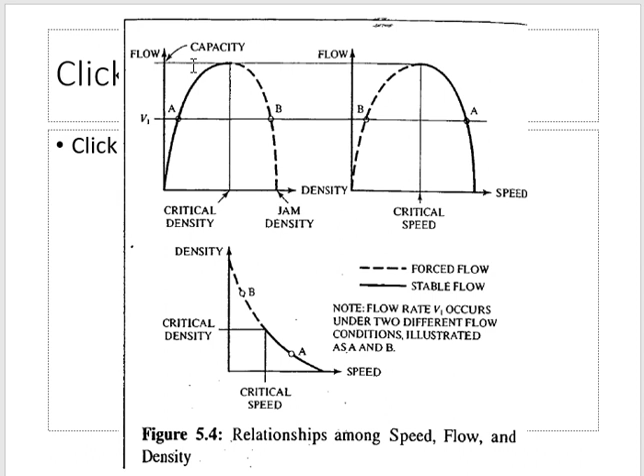These are the equations of the curve: V equals 65d and so on, V equals 110s and so on. You take the derivative, it will become the equation of the slope.

And when you are at capacity, the slope is 0. So I take the derivative and put it equal to 0. I can do the same thing with both equations, right? Because in both cases, whether that curve or that curve, it is 0.

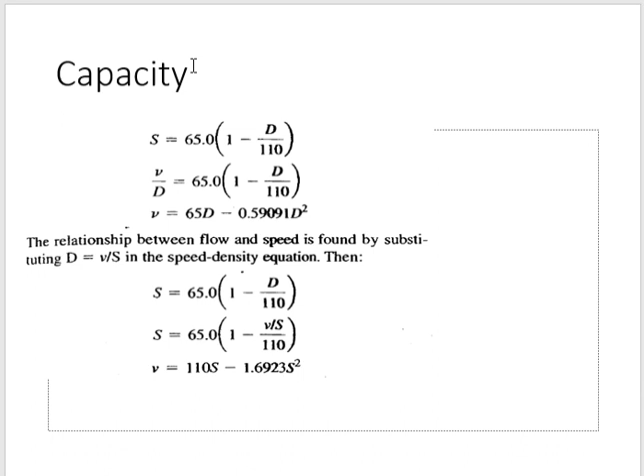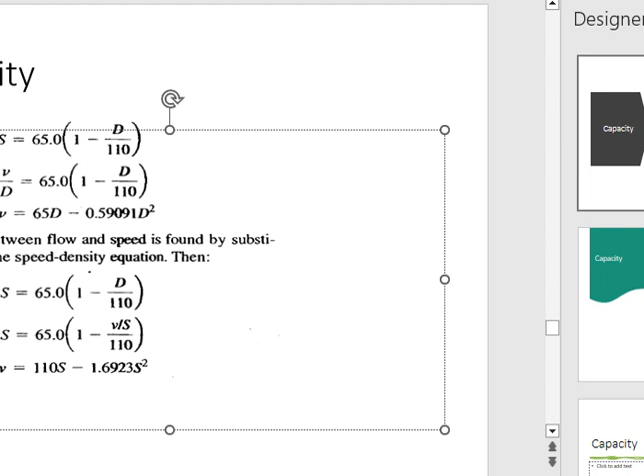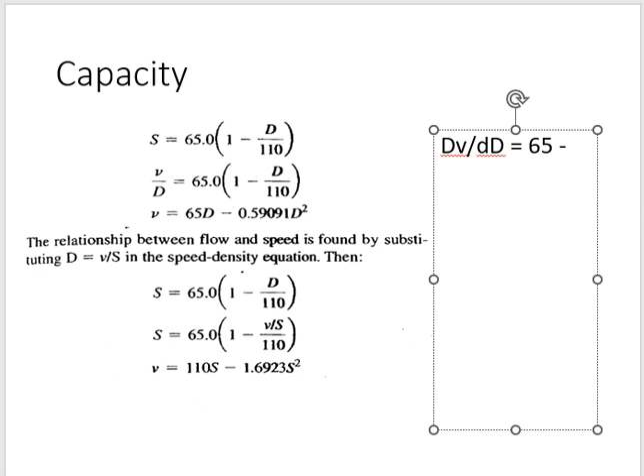This is done here, right? So derivative of the first equation, between flow and density, dV upon dd equals 65 minus 2 into 0.5909 D, and this should be equal to 0.

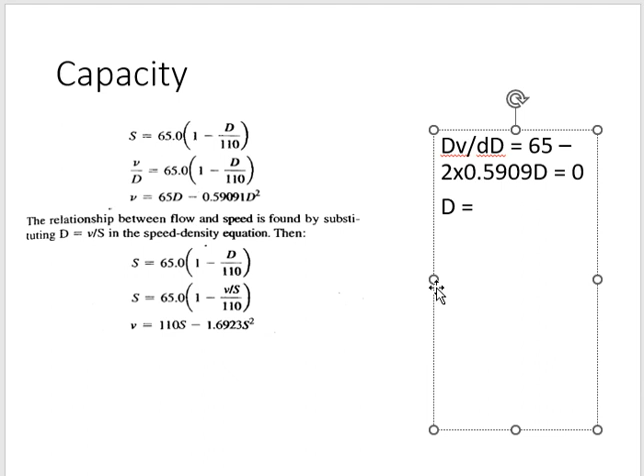So give me D. 55 vehicles per mile per lane.

Okay, clear up till now? Now, this is the D when slope is 0, and slope is 0 at maximum flow, and maximum flow is called capacity. So this is the density value when you reach capacity.

And we gave it another name - what was it? Critical density. So this is my critical density, I will write CR here. Capacity is per lane.

This is for that equation. Remember, we had a curve and some data - you change the data, these values will change. Any problem till here?

Now, if I do the same thing with the flow speed equation, dV by ds, it will be 110 minus 2 into 1.6923 S, and this should be equal to 0. So S equals to what?

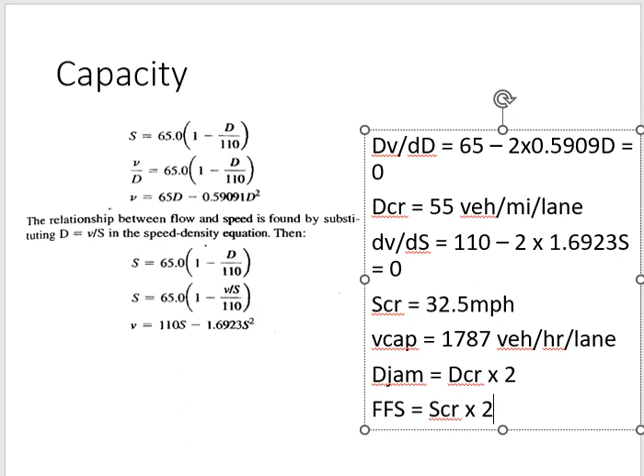Just to prove the point, we have another example. In this example, they already gave me the straight line equation between speed and density. The others are not a straight line, they are something else. Now they are saying find out the free flow speed, jam density, derive the other relationships between flow and speed and flow and density, and find out the capacity.

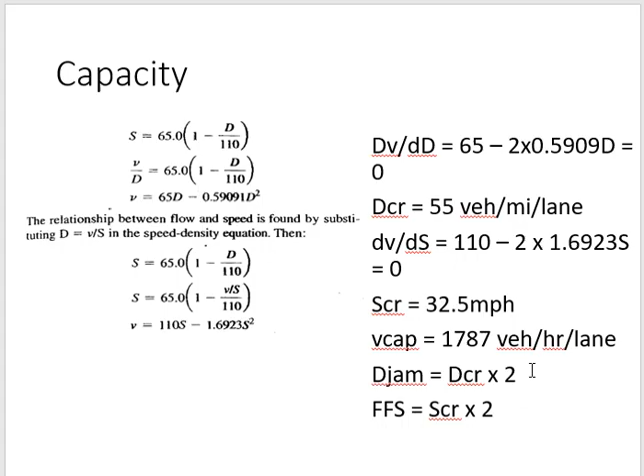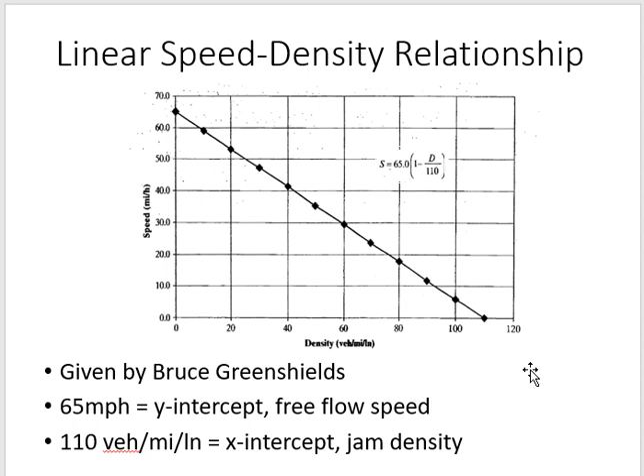Clear? Three things. Let's start with the first one, free flow speed. I'll go to the speed density curve. Don't look at the values, but look at the line itself. When I reach free flow speed, my density is what? 0. You have the equation, right? Between speed and density, equation is given. So now what do you do in this equation? Put 0 density, you will get free flow speed.

What about jam density? You were saying something? No? For jam density, speed is 0, it's jam, right? So no speed. So now what do we do? I put speed as 0, I will get jam density. So give me free flow speed and jam density.

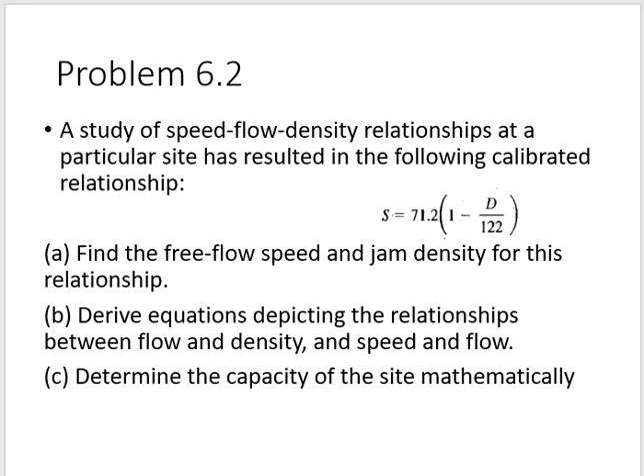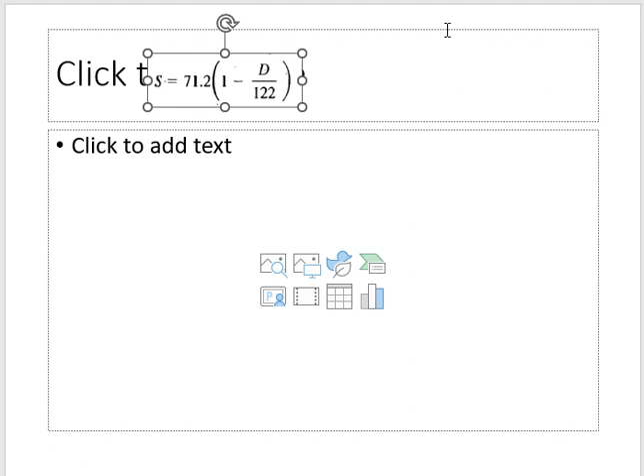Very smart. Yeah, it's correct. I don't mind if you do like this, no problem. Yeah, free flow speed is 71.2. But I'm telling you how do you get it. At free flow speed, density is 0, put density as 0, you will get 71.2, no problem.

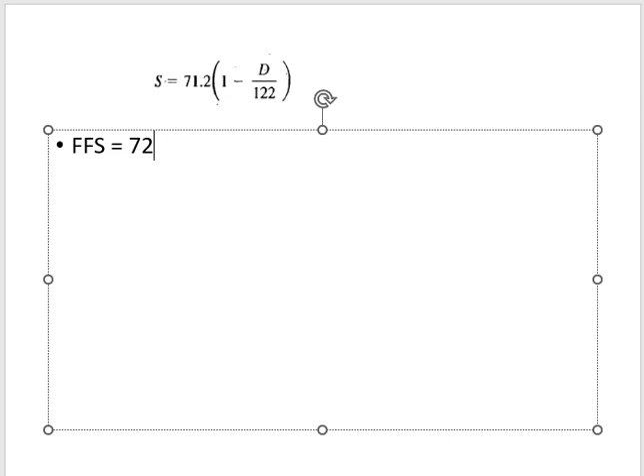And jam density, you put speed as 0, density equals to what? 122. Okay, you get the point, right? How do I get it? If you take 1 minute extra, no problem.

Clear up till now? We did the first part, this was the first part. Second part is find out other relationships. For other relationships, I have this equation.

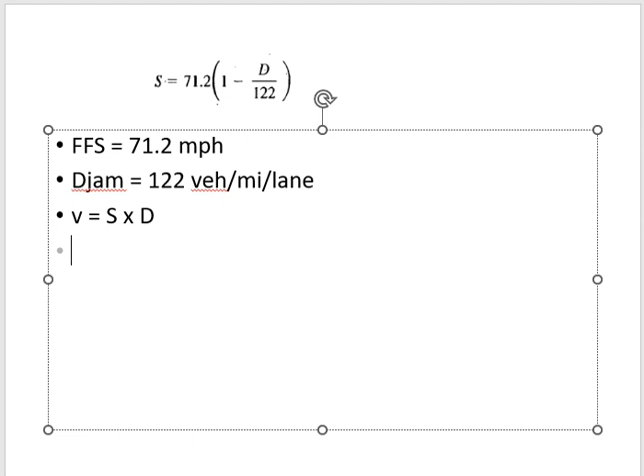And which other equation did we use? Flow rate equals... okay, so from here I will take, which one first, D or S? S, it's easier, V on D. So in the top equation you will put now V upon D equals 71.2 minus, I am opening the bracket now, 71.2 upon 122 D.

So V equals to what? 71.2 D minus... how much is this? 0.584 D square. Let me put it like this. Any problem?

V equals S into D. So S equals V upon D. I replace S with V upon D. So this becomes this. I open the bracket, replace S with V upon D, and then I open this bracket. And you put D, then I put D over here. Clear? Any question? They need these equations now.

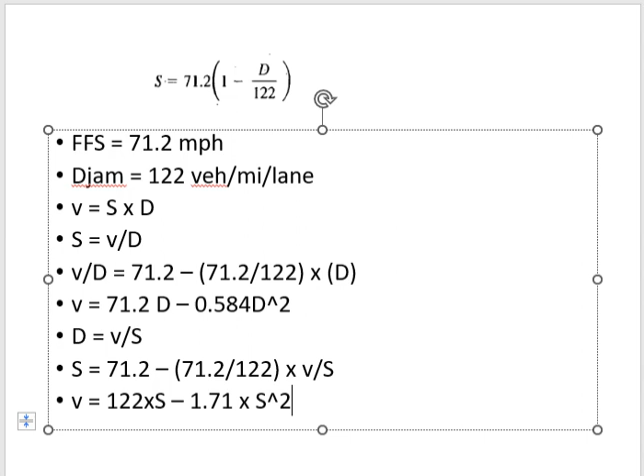Last time, in the previous example, we were looking at what will happen to critical speed and critical density. So I took the derivative of both equations. Here you don't have to do this, you can pick one equation. Pick any one, which one? This one or this one? We will do the voting. Who says this one? And who says this one? And the rest are sleeping. Right? There's no big deal, it will be the same, right? Okay, let us pick this one.

So dV by dD is what? 71.2 into... okay, and this gives you D critical of what? How much? 60.96.

Okay, so this is the D when you reach capacity. Now you put this D back into this equation. The flow you will get is capacity. Okay, how much is this?

Two one... 70. So in the last question it was 1700 something. In this question it is 2100 something. You can see the difference, right? So it's not a small difference, it's a big difference. Clear? It can be even less than this or more than this. It can go up to 2,300 as well, 2,400 as well. It can be as low as 1,500 or 1,400.

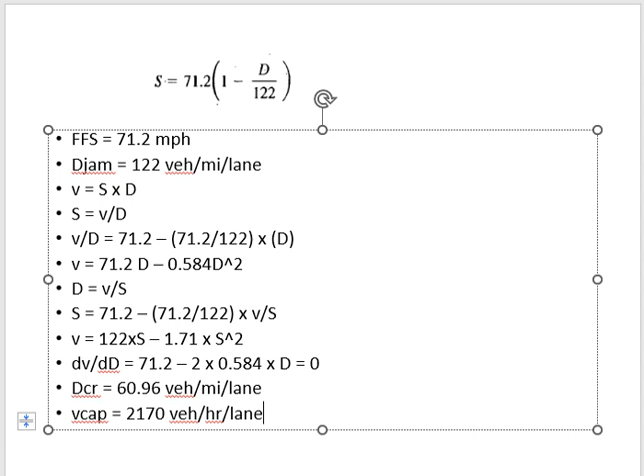Okay. We said there are two types of facilities, right? Interrupted and uninterrupted. What's the main difference between them? What's the difference between interrupted flow and uninterrupted flow? External interruption, right? And we put external interruption because of what? Because of intersections. Okay, so all these calculations we did up till now, the graphs, the equations, all of them were for uninterrupted.

Okay, so traffic increases, speed reduces, density increases, and so on. Everything works fine when uninterrupted. When you come to interrupted, the main thing is there is some external interruption, maybe a signal, a stop sign, a roundabout, and that external interruption will stop you. Whether the traffic in your direction is high or low doesn't matter, whether the density is high or low doesn't matter. You reach that interruption, you have to slow down, you have to stop, okay?

So obviously in those equations, the equations which we just did, was there anything indicating there will be a signal, a roundabout, a stop sign, a car coming from the parking? So those equations will not work. But even on interrupted flow facilities, we may use those equations in some parts. Which parts? The parts when you have crossed the interruption. So you were on a signal, people who are coming on the signal, those equations will not work for them because the signal is stopping them. But what will happen when they pass the signal? When they cross the signal, until the next signal comes, their flow is uninterrupted.

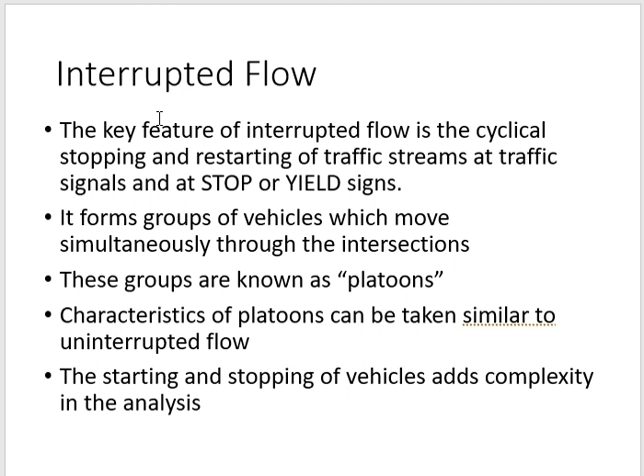There are some important terms for us, and they are all related to volume, and I have mentioned them earlier. One of them is traffic demand, then we have traffic volume, and then we have capacity. Demand, volume, capacity. Now, traffic volume means what? Number of vehicles per hour or per day. Normally we take 1 hour. Hourly volume is more common, and here we are talking about hourly volume because we are comparing it with the other terms, capacity and demand. What is capacity?

Maximum rate of flow. What is demand? Demand is volume. Demand can be volume, yes. Or demand can be desire to pass.

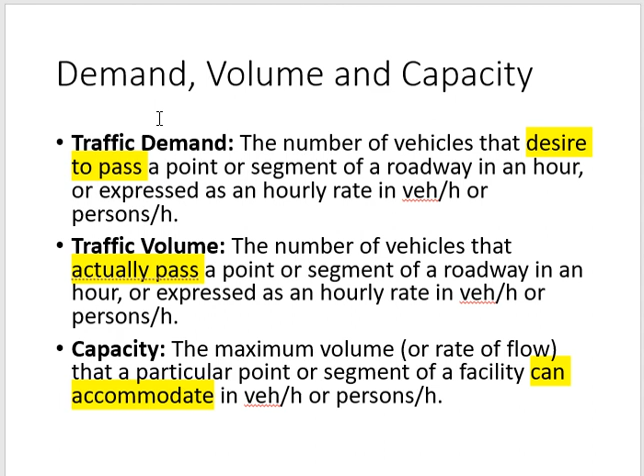The other two can change. Demand and volume can change. Which one affects the other? Demand affects volume. High demand, high volume, and vice versa.

There can be certain cases in which demand can go more than volume. Demand can be more than volume, more than capacity. There can be cases where demand is more than capacity. We see it very often on the roads. You get stuck in traffic jam, long queues. So this is a situation when demand is more than capacity.

If this happens, what can we do? There are certain actions written here. What can you do as a driver? Or what can you do as an authority? Let's say you are in the traffic authority, so you are planning, you want to reduce a traffic jam. You know on this road at this time there is a traffic jam. What can you do? Or you are the driver. You know at this time and this road there will be a traffic jam. So what do we do?

Change it. You tell your teacher, I cannot come at this time, transfer me to the other section. No, you change, and then you sleep at home till 12 o'clock. Yeah, you change to other highways, you change to other routes. You tell the driver there is a congestion ahead, or the driver himself knows there is congestion on this road and he goes to some other route. In some cases, you may go to a longer route to avoid congestion, because if you go there, you will be stuck in traffic jam for half an hour. This longer route will only take 5 minutes extra.

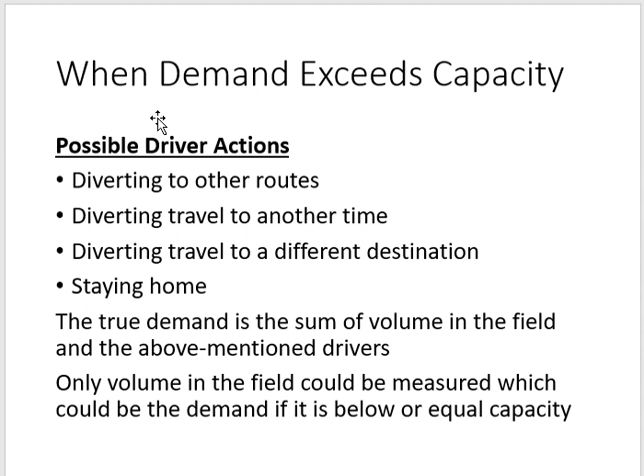Okay, so if there was no congestion, somebody who is going from another highway, he will be here. If there was no congestion, somebody who is going after half an hour, maybe he will go now. Somebody who is going to a different place, maybe he will go to this place now. So he is part of the demand. You have to take these things into account, and keep in mind that the demand cannot be, or will not be, always the number of vehicles which you see on the road.

Okay, now when the demand goes over capacity, there are a few things we want to calculate, a few important parameters: how much will be the delay, how many people will be delayed, and how long will be the queue. There are three important things for us. So we'll do one example.